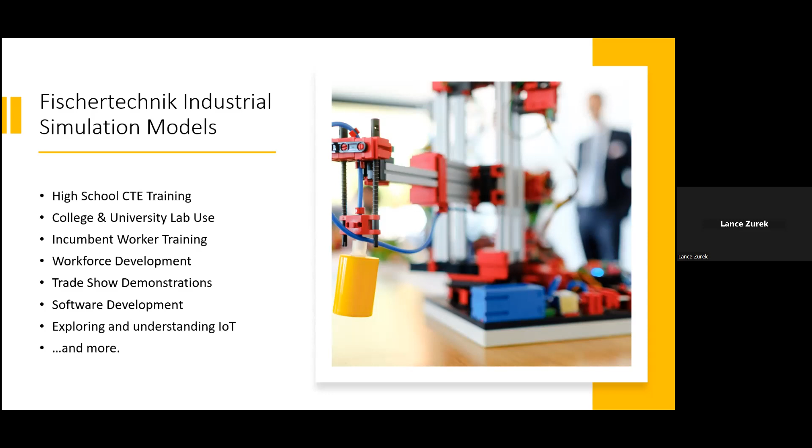So we're going to start off by considering the skills gap. If you've attended any of our other fischertechnik education webinars, you've probably heard me discuss the importance of STEM education. STEM is the acronym that stands for science, technology, engineering, and mathematics. It really should go without saying that STEM education has probably been the most hotly discussed topic in education over the last decade.

As most of us are aware, the push for developing STEM skills in students is largely to help best prepare them to take their place in the modern workforce. Not so long ago, when our parents or grandparents were entering the workforce, employers in areas such as manufacturing might have been satisfied with hiring workers who could demonstrate good motor skills and a solid work ethic.

But as manufacturing becomes more and more dependent upon automated processes and robotic control, employers now desperately need individuals who have backgrounds in areas such as mechatronics, industrial electricity, mechanical components, and programming PLCs.

And as it ties in directly with the solutions we're going to be looking at in this presentation, let's stop for a minute and consider that last skill area I just touched upon, that of being a PLC programmer.

First off, in case you're not familiar, let me explain exactly what a PLC is. The term PLC is an acronym, the letters of which stand for Programmable Logic Controller. Essentially, a Programmable Logic Controller, or PLC, is a very specialized computer used to control the types of machines and automated processes typically found in an industrial setting.

These are things like an automated manufacturing plant. As the world of manufacturing becomes increasingly dependent upon these automated control systems, the need for workers skilled in the programming of such systems grows exponentially.

So to get a clear idea of just how highly prized these kinds of programming skills are, here are some salary figures for PLC programmers as quoted from job search website neuvoo.com. Quote: the average PLC programmer's salary in the United States is $78,000 per year, or $40 per hour.

Entry-level positions start at $43,924 per year, while most experienced workers make up to $132,600 per year, end quote.

Now, as I worked on the original version of this webinar back in 2020, I took a look at the list of current job openings for PLC programmers listed on neuvoo.com. At the time, the list showed 15 positions being advertised, all showing salaries of over $75,000 per year, and two of which even listed salaries of $195,000 per year for PLC programmers.

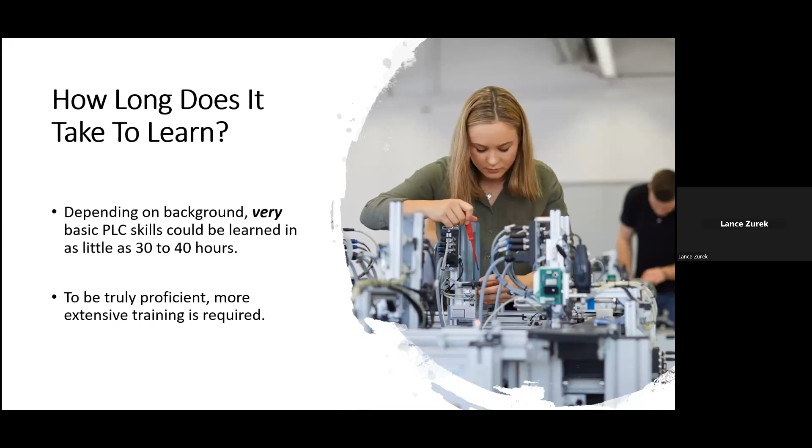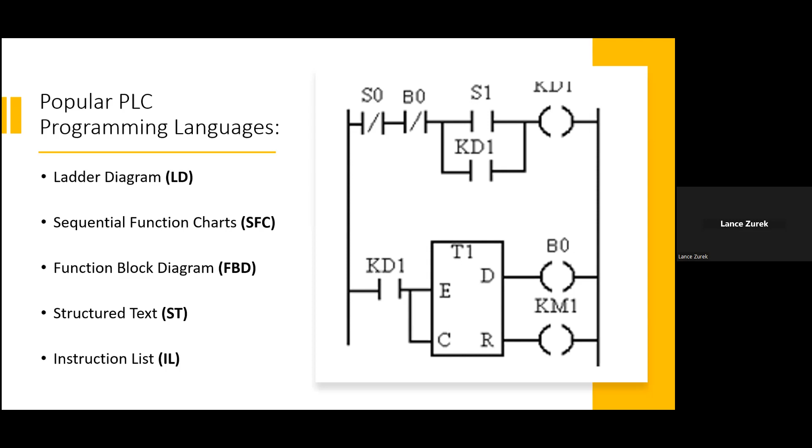Well, depending on a student's background and experience, very basic PLC programming skills can be learned in as little as 30 to 40 hours of study. Of course, to become truly proficient in all 5 of the most widely used PLC programming languages, which you see listed on the screen now, as well as really learning how to efficiently troubleshoot and address errors and equipment breakdowns, more training would be required.

Now, once again, while many students can learn PLC programming skills in a college lab setting, there are other options available—things like high school CTE programs, adult continuing ed programs, vocational training, technical training in trade schools, and employer-sponsored incumbent worker training programs.

That all being said, the question that still arises for the educator—whether you're in the university or the vocational school setting or whatever kind of classroom you're in—is how do you go about teaching PLC programming in a way that makes it engaging and relevant to the student, whatever their background? How do you get away from the dryness of textbooks and video presentations that had their moment, but now everybody's seen it, and instead make it more realistic and hands-on?

But before we go more into that, there are other areas of focus beyond just programming that need solutions for demonstrating, exploring, and understanding different aspects of automation and control systems. It could be a company involved in creating or marketing a new type of software-based solution that's looking for ways to make more tangible processes which might otherwise be perceived as abstract, or to test it out in a more realistic fashion.

Maybe it's a manufacturer looking for ways to better visualize the production process for workers or stakeholders as they prepare to build a new factory. Or perhaps it's even a company looking for engaging ways to demonstrate their services or solutions in a public setting, such as a trade show. In each of these cases, and there are more, there is a need for finding a solution that can effectively mimic and simulate real-world automated systems.

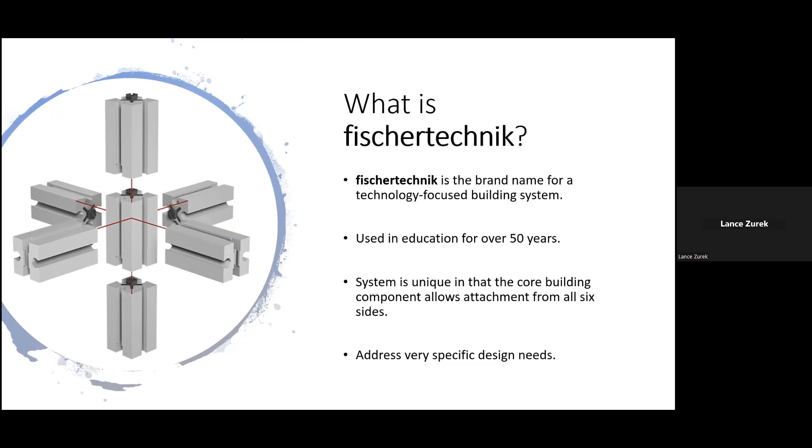Now, many of the parts that are used in the system are designed to slide together and lock in place using the tongue and groove assembly method—again, I would refer you to the diagram on the screen. And the hundreds of different parts available will also help you to address very specific design needs.

The system itself was created back in the 1960s by German inventor Arthur Fischer, who's noted for countless innovations used in both construction and the automotive industries. Mr. Fischer, at the time of his death in 2016, held more patents in his name than Thomas Alva Edison had amassed during his own lifetime.

Besides fischertechnik, Mr. Fischer was the inventor of synchronized flash photography, back in 1949, and he is also credited as the creator of the expanding nylon wall plug, which is commonly used in conjunction with a screw or a bolt to help anchor heavy objects to walls.

His company, the Fischer Group, still employs thousands of workers worldwide, producing many variations of fastening devices used in building construction. They also produce numerous components used in automobile assembly, as well as providing consulting services to companies who wish to employ state-of-the-art manufacturing processes.

Now, once again, the focus of fischertechnik sets, whether those intended for the retail market or for classroom use, has always been on helping to foster an understanding of technology. Many of the products offered by fischertechnik for the education sector are what we would call subject-specific sets, focusing on different STEM-related areas, things like mechanics, pneumatics, robotics, or renewable energy.

Now, in most of these sets, students are asked to build a progression of models using the unique fischertechnik system, and then perform various experiments, which allows them to explore and understand different aspects of that particular subject. There are also sets put together for a classroom program. There have been curriculum-based programs over the years, and also project-based learning programs using fischertechnik, where students do a lot of trial and error work, work in teams, and devise their own solutions to different problems, usually built around mechanics and automation. So that's kind of what the fischertechnik education line is usually about.

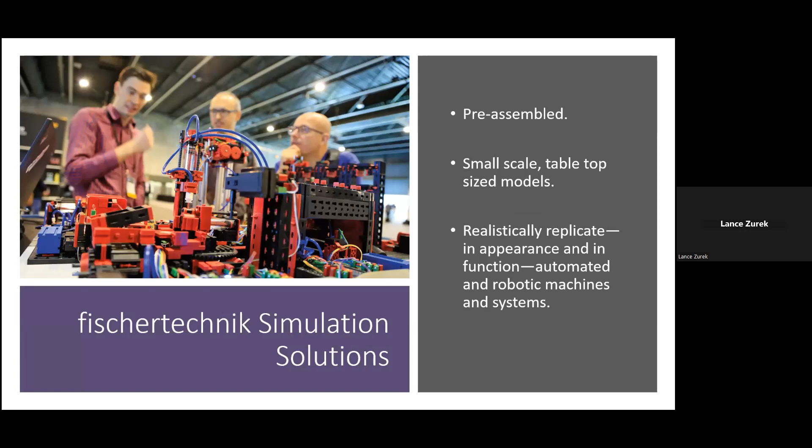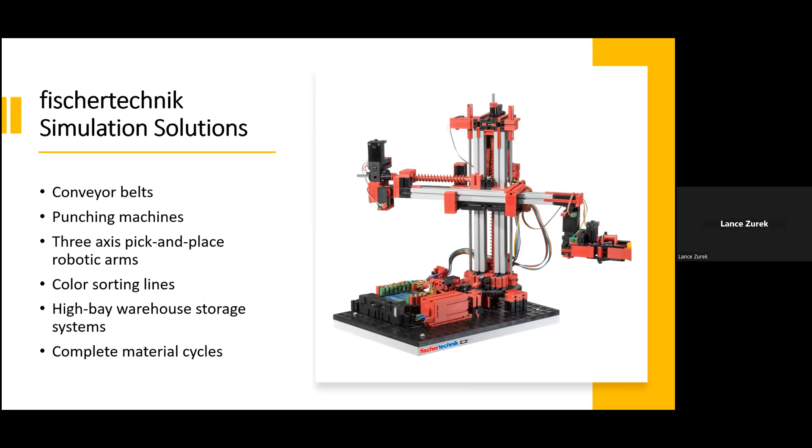Now, the line of fischertechnik simulation solutions, which are the focus of today's presentation, are something a lot different. This line consists not of kits, but a series of pre-assembled small-scale models designed to replicate in both appearance and function various automated robotic machines and systems. The types of models you'll find include conveyor belts, punching machines, three-axis pick-and-place robotics, color sorting lines, and even high bay warehouse storage systems. Besides these individual models, fischertechnik also offers an integrated factory simulation model, consisting of 4 individual workstations: a vacuum gripper robot, a high bay storage warehouse, a multi-processing station with an oven, and a sorting line with color detection, all combined to work together as one self-contained material cycle.

Now, before we begin to look at the models in the simulation line in more detail, I'm going to briefly outline some of the advantages of using fischertechnik solutions. I apologize in advance for any points I've touched on before, but I think in each case it's worth repeating.

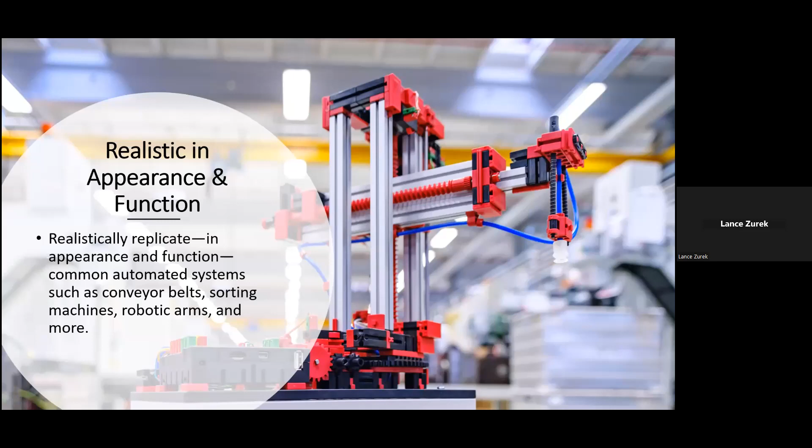First, fischertechnik simulation solutions allow educators to offer engaging, hands-on tools for teaching, exploring, and understanding various aspects of automation and programming. This can be for understanding how automated systems work, or for having a tangible physical system to observe and work with in a programming or PLC-focused learning environment. The models are designed to realistically replicate, in both appearance and function, common automated systems such as conveyor belts, sorting machines, robotic arms, and much more. Because the models are compact and in most cases tabletop size, they are ideal for use in the classroom or in-office demonstrations, but also for demonstrating software or other technology-based offerings in a trade show environment.

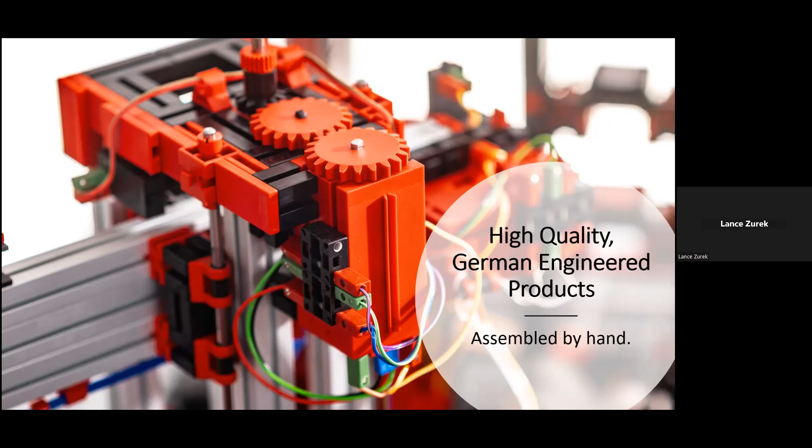The next factor is quality. Each fischertechnik simulation model is a hand-assembled, high-quality, German-made product. Each of these models is available in a 24-volt version, designed for use with industry-standard PLCs. It doesn't matter whether you use Allen Bradley controllers, if you prefer Siemens controllers, or if you use controllers from manufacturers such as Honeywell, Mitsubishi, General Electric—we could go on and on. In any case, you can control these 24-volt simulation models with the PLC you prefer.

Likewise, just as you can use your choice of controller, you can also use your preferred programming language from the versions listed on the screen right now. Please note that with the 24-volt versions, no PLC is included, with one exception which we'll talk about at the very end. But in most of these cases, no PLC is included. Any wiring from the model itself to where the PLC plugs in would be something the end user would have to take care of themselves. Any programming guidance, power supplies, and so on are the responsibility of the end user. So in most cases, unless noted otherwise, we're talking about a model that you're going to need to incorporate with the wiring, the PLC, and the programming on your end. If you're using a trainer or what have you, you could incorporate it with that as well.

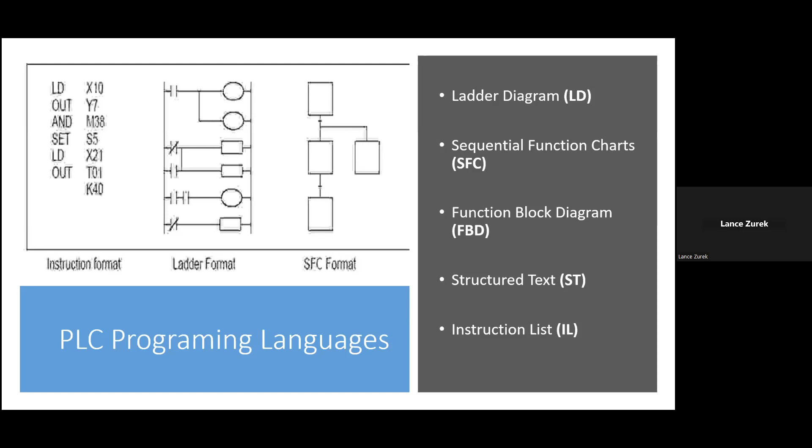Now, in addition, for non-industrial users and for educators who aren't versed in or familiar with using PLCs or getting into PLC programming, there are a select few models available in 9-volt variations. These 9-volt variations ship pre-wired to fischertechnik's own proprietary robotic controllers, called the Robotics TXT controllers, and some of the models are being upgraded to the new Robotics TXT 4.0 controllers. Each of these controllers comes pre-programmed using fischertechnik's own proprietary RoboPro graphic programming software.

In the case of the 9-volt models, the only additional component required on the end user's part is purchasing a 9-volt power adapter or power supply, and some models may require a few of these. I will mention this as we discuss each model. Otherwise, the 9-volt versions should be pretty much ready to use right out of the box.

If you're involved in demonstrating or exploring IoT, the Internet of Things, besides the fact that many end users have adapted models in the primary line of simulation and training solutions for IoT purposes, fischertechnik now also offers a special IoT-focused version of the factory simulation, designed specifically for exploring and understanding cloud control and what is often referred to as Factory 4.0.

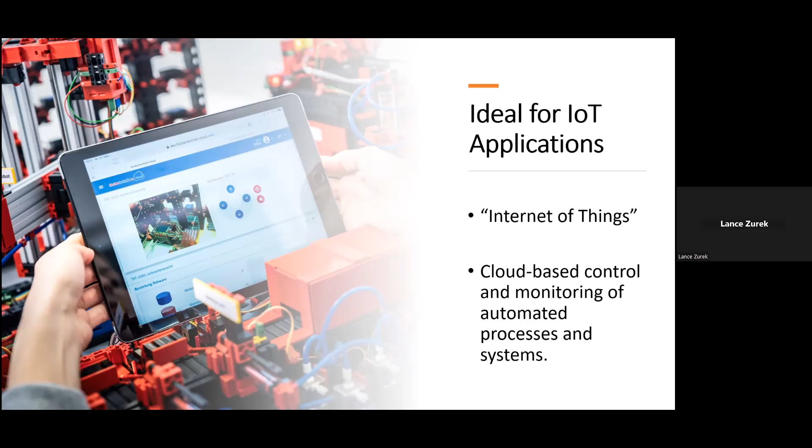Finally, fischertechnik simulation models are cost-effective. If you've had the opportunity to look at other hardware-based industrial simulation options in the marketplace, you'll notice the entry point for many products can easily be $20,000 to $30,000 or even much more. fischertechnik simulation solutions, on the other hand, are often available at just a fraction of that price, while still being compact, realistic, and high-quality learning and demonstration tools.

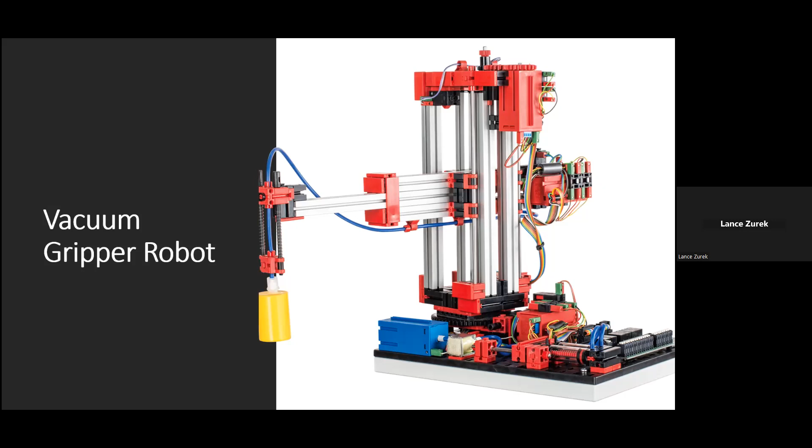First off, we're going to look at the vacuum gripper robot, as you see in the picture here. Got a little video we're going to share.

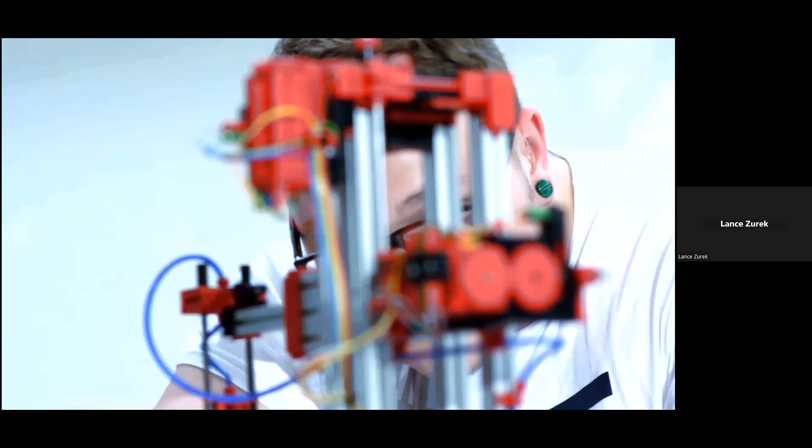As you're going to see in this video, the vacuum gripper is a 3-axis robotic model with a vacuum gripping device. The model is designed to precisely pick up and position workpieces in 3-dimensional space. It includes 3 encoder motors, 3 push-button limit switches, a vacuum suction device, a compressor—the blue brick component you see in the video—and a solenoid valve. The model's dimensions are approximately 9 by 19 by 15 inches, and it weighs about 7 pounds.

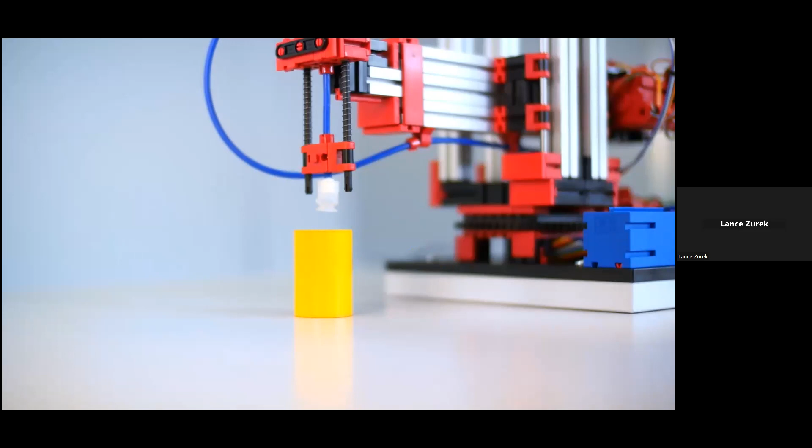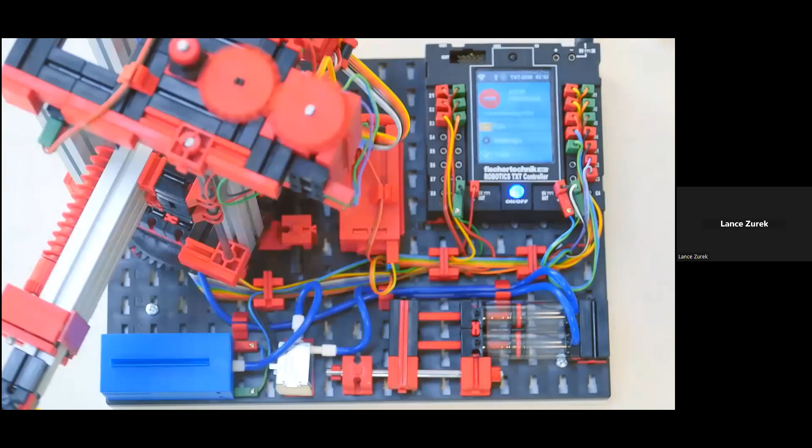The 24-volt version of this model, as well as all of the first 5 24-volt models we're going to look at today, each have a relay board for motor polarity reversal, and both a multi-pin connector with 34 pins at a grid of 2.54 millimeters, as well as additional PCB terminals with push-in connections for all inputs and outputs. This 24-volt version, as well as all the 24-volt versions we'll look at in this first part of the presentation, will require you to provide the PLC and the programming, and do any additional wiring.

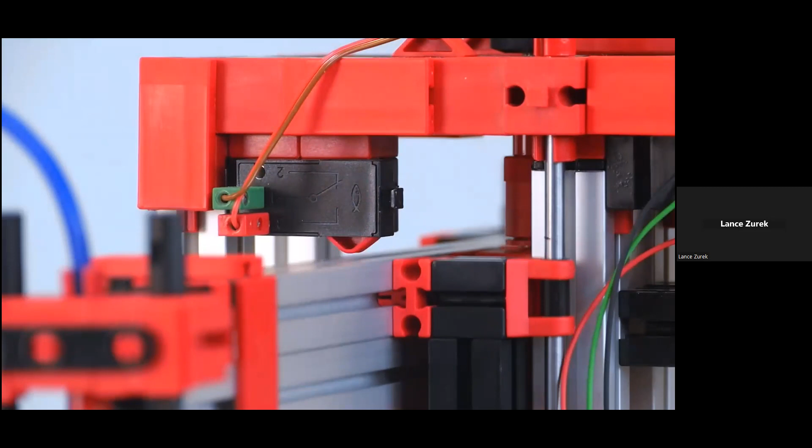I will also mention that for this and all the other models we're going to look at today, the specs are detailed in the product listings found on the Studica website and the fischertechnik.biz website, as well as in our product brochure, which I'll provide information on obtaining at the end of this presentation if you're interested. So we'll just let this play out for a second here.

And I will mention, as I didn't touch upon 9-volt versions, this one is not available in the 9-volt version.

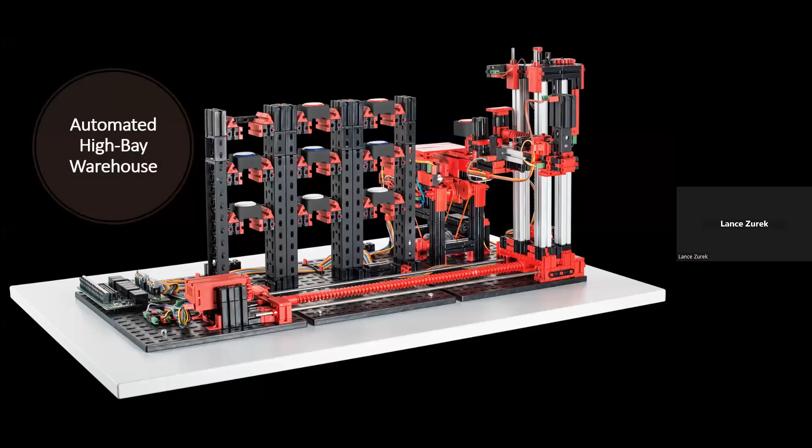The next model we're looking at, which will have a 9-volt version, is the automated high bay warehouse. The model you're going to see here features a transfer station with a conveyor belt, along with a shelf stacking mechanism for storing and retrieving workpiece carrier trays, and 9 individual storage spots. Components on this model include 2 encoder motors, 2 mini motors, 4 push-button limit switches, 2 phototransistors, 2 LED light barriers, and a selection of different colored workpieces along with carrier trays for each.

I will mention that this particular model ends up being a real favorite among educators I've spoken with who are involved in programming. The reason is it gives you so much to work with regarding the programming of the movement of the picker arm, the picker mechanism, and the precision needed to insert and remove the different workpieces from the storage bins. Because of all the specialized coding that has to be done for each of those steps, it's really beneficial for any classes working on programming.

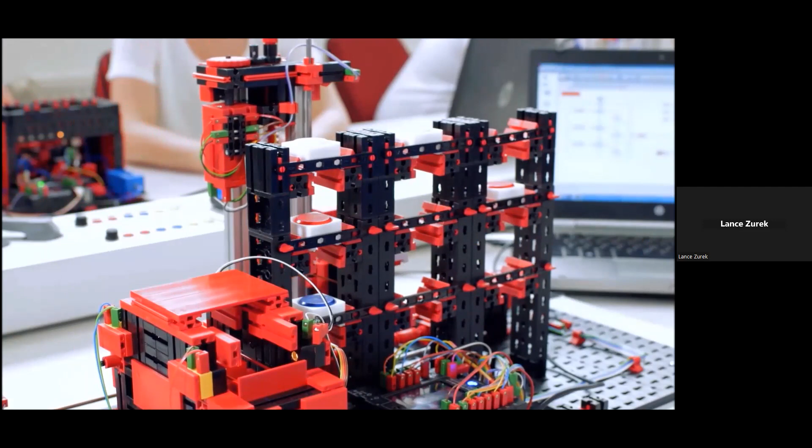The dimensions for the model are approximately 19 by 28.5 by 15 inches, with a total weight of about 18 pounds. Again, the 24-volt version has a relay board for motor polarity reversal in both the multi-pin connector, 34 pins with a grid of 2.54 millimeters, as well as additional PCB terminals with push-in connections for all inputs and outputs. And again, you will need to provide the PLC and the programming.

There is, as I mentioned, a 9-volt version available at this time, which is pre-wired to a pre-programmed robotics TXT controller, and it does require one power adapter, which we do sell.

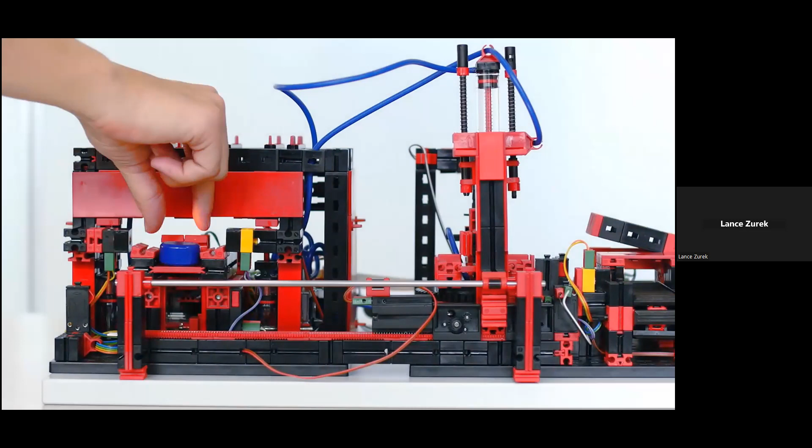The next model in the line that we're going to be looking at is the multi-processing station with oven. The model you're going to see here features a furnace simulation with a pneumatic sliding door. There's a downstream processing station with a pneumatic transfer unit that includes a vacuum gripper, a cutter with a rotary table, and a conveyor belt.

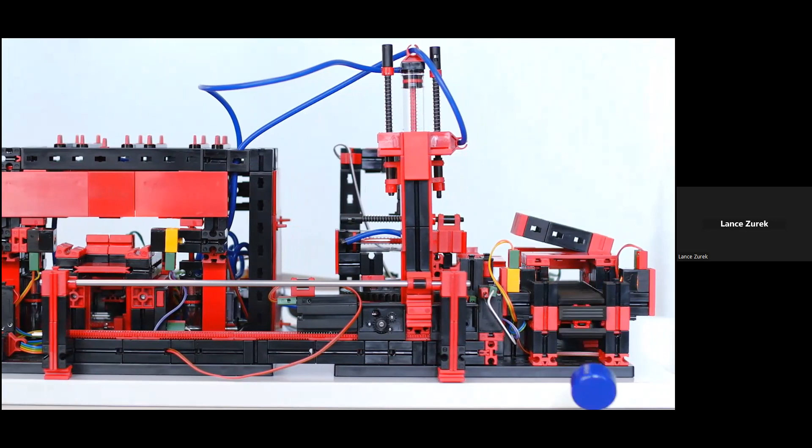Components on this model include 4 mini motors, 6 push-button limit switches, 2 photo transistors, 2 LED light barriers, 4 solenoid valves, and a compressor.

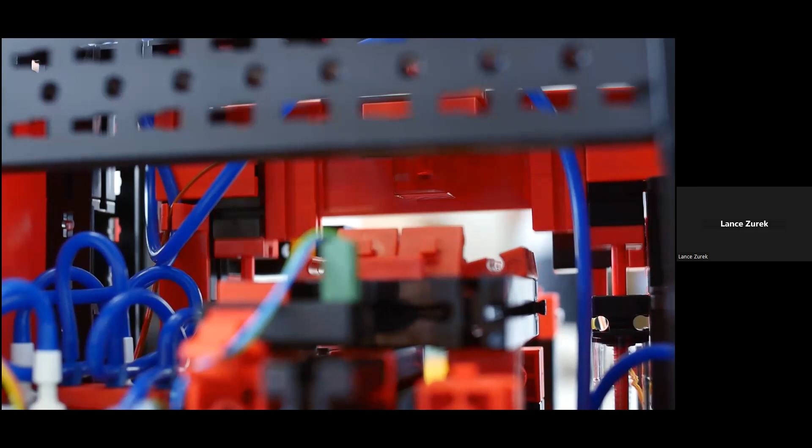The dimensions for this model are approximately 20 by 14 by 12 inches, with a weight of about 11 pounds. Again, the standard version of the model and the 24-volt version for use with a PLC of your choice has a relay board for motor polarity reversal in both the multi-pin connector, 34 pins with a grid of 2.54 millimeters, as well as additional PCB terminals with push-in connections for all inputs and outputs.

And there is a limited edition 9-volt version. In this case, it's connected to 2 robotics TXT controllers. Because of that, the 9-volt version would require 2 power adapters, not just 1.

Let this play for just a second.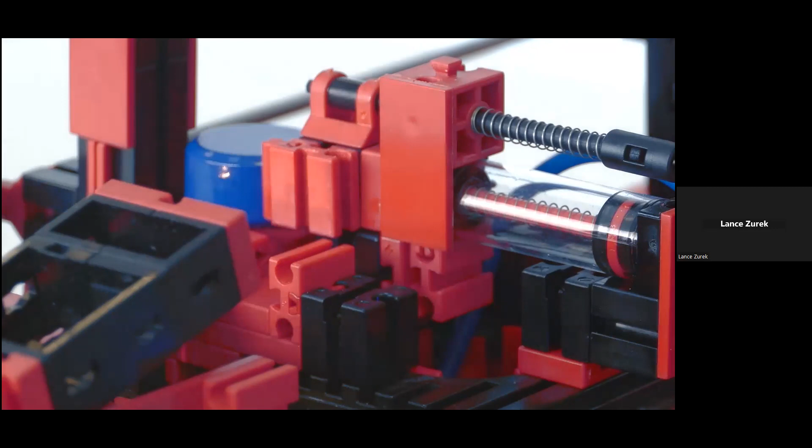Sometimes I get a little ahead of the videos, and sometimes the videos get a little ahead of me. And there we go. And she says it's cool.

The next one we're looking at is the sorting line with color detection.

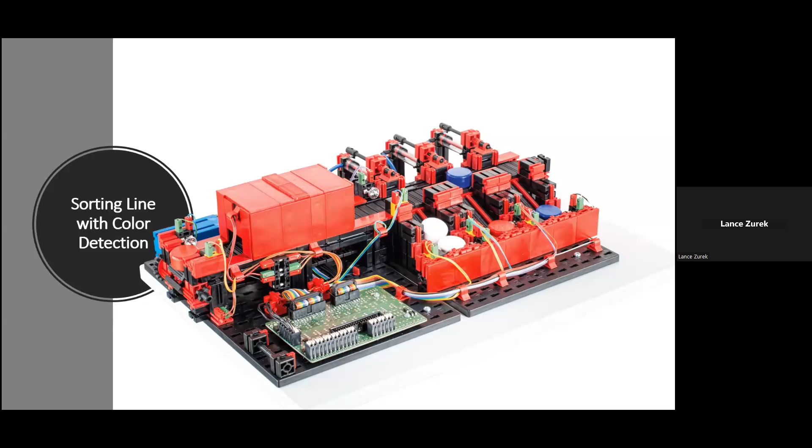Let me just do one thing here. Okay.

Now, this simulation features a system for detecting workpieces of different colors, and it sorts them via conveyor belt into 3 different storage bins. Components on this model include 2 mini motors, 5 photo transistors, 5 LED light barriers, 3 solenoid valves, a compressor, and an optical color sensor.

The dimensions for this model are approximately 20 by 14 by 12 inches, with a weight of just about 10 pounds. As with the models we've looked at before, the standard 24-volt version has a relay board for motor polarity reversal in both a multi-pin connector, 34 pins with a grid of 2.54 millimeters, as well as additional PCB terminals with push-in connections for all inputs and outputs. Again, you will need to provide the PLC and the program.

And the limited edition 9-volt version, in this case we do have a 9-volt version as well, again comes pre-wired to a pre-programmed robotics TXT controller, and one 120-volt power adapter is required for that.

We'll let this play for just a second. Oops.

And we'll just let this finish through.

The next model we're going to look at is the factory simulation, which combines the 4 models we've just reviewed: the vacuum gripper robot, the automated high bay warehouse, the multi-processing station with oven, and the sorting line with color detection into one self-contained material cycle.

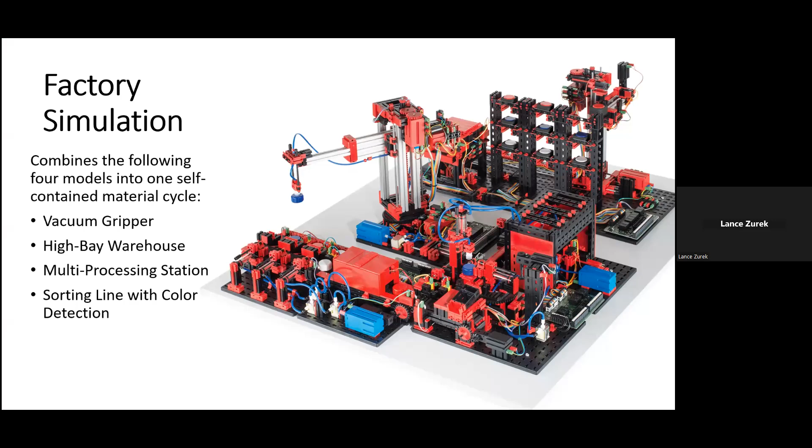The cycle works like this: work pieces are retrieved from the automated high bay warehouse using the vacuum gripper robot, then moved to the multi-processing station with the oven. After the workpiece has been processed by this machine, it is sorted by color in the sorting line with color detection before being again moved by the vacuum gripper robot to the automated high bay warehouse for storage.

As we've already discussed the components of each model previously, I'm not going to restate them here, but I do want to discuss the dimensions of this model as a whole. As it combines 4 individual models into one work cycle, it has a much larger footprint, approximately 39 by 31 by 16 inches, and a total weight of between 43 and 46 pounds, depending on whether we're talking about the 24-volt version or the limited edition 9-volt version.

Due to these dimensions, please note that this model will only be shipped flat as freight on a pallet. I also want to point out that as the factory simulation models tend to be in high demand, please anticipate a possible turnaround time of up to 3 weeks prior to any orders for this model leaving our warehouse.

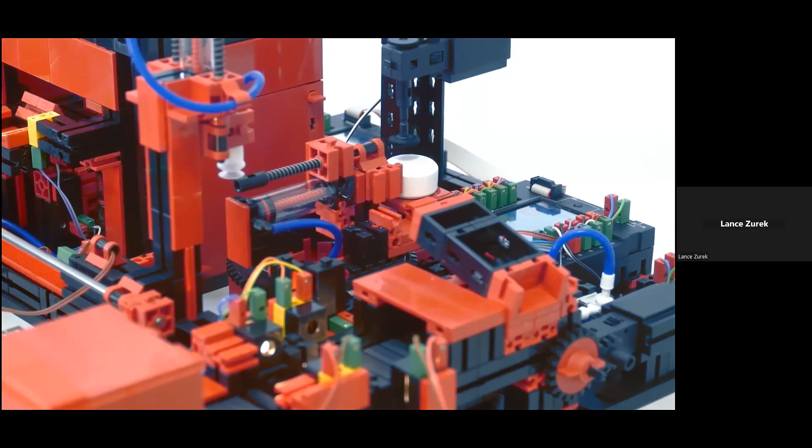A few things to note. First, this is currently available in the standard 24-volt version and in very limited quantities in a 9-volt variation as well. In the case of the 9-volt version, it's wired to 5 robotics TXT controllers, and as such, it's going to require 3 of the power adapters.

As always, the 24-volt version will require the end user to provide the PLC, the programming, and any other hardware required. Again, each station of the 24-volt version has a relay board for motor polarity reversal, multi-pin connectors, as I touched on before, and PCB terminals with push-in connections for all inputs and outputs.

Before we move on to the next group of models, I want to mention that there is a storage option available for those users of either of the 2 factory simulations we just looked at, who will need to transport the model or protect it when not in use.

The travel case consists of an aluminum case maker profile with plastic plates and steel ball corners, as well as 4 steel tilt handles and angle protection corners.

The upper section of the case is partially lined with soft foam blocks in different heights to help cushion the model, and it also has 3 internal zipper pockets for storing cables and other accessories. The lower portion of the case is lined with hard foam, and it's designed so that once the top of the travel case is removed, the model can remain in the bottom section of the case and be fully functional.

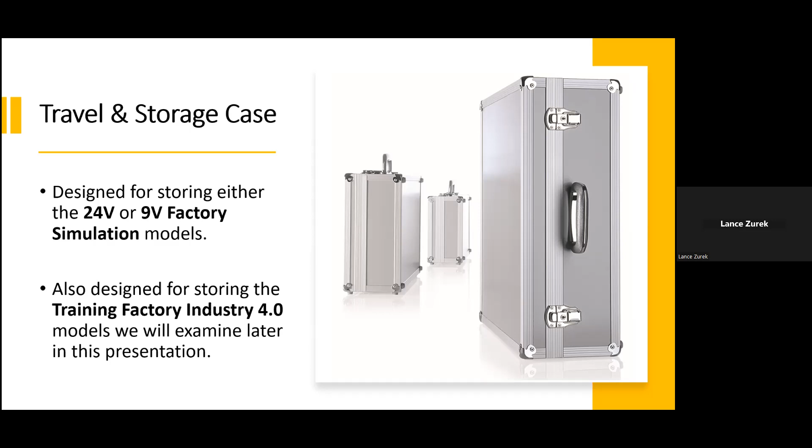The case has exterior dimensions of approximately 41 by 33 by 17 inches, and a weight of about 53 pounds. Please note that even when you use the travel case, these models will still need to be shipped flat, and if shipping them to a different location, you will still always want to ship them on a pallet just to protect them.

Moving right along, we're going to look at the conveyor belt. As you see, it's a very basic conveyor belt. It has a transport belt with a length of 275 millimeters that is used to transport work pieces with a diameter of up to 29 millimeters. Multiple conveyors can easily be connected to increase the length of transport as you may desire.

Components on this model include an XS motor, a push-button limit switch, 2 photo transistors, and 2 LED light barriers. Dimensions for the model are approximately 14 by 10 by 4 inches, and it has a weight of just about 2 pounds.

The next model is a variation of the conveyor belt, which includes a punching machine component. This features essentially the same conveyor we just looked at, except this time the machining station is built onto it. The components on this model include 2 XS motors, 2 push-button limit switches, 2 photo transistors, and 2 LED light barriers.

Dimensions of the model are approximately 15 by 12 by 7.5 inches, and it has a weight of about 3.5 pounds.

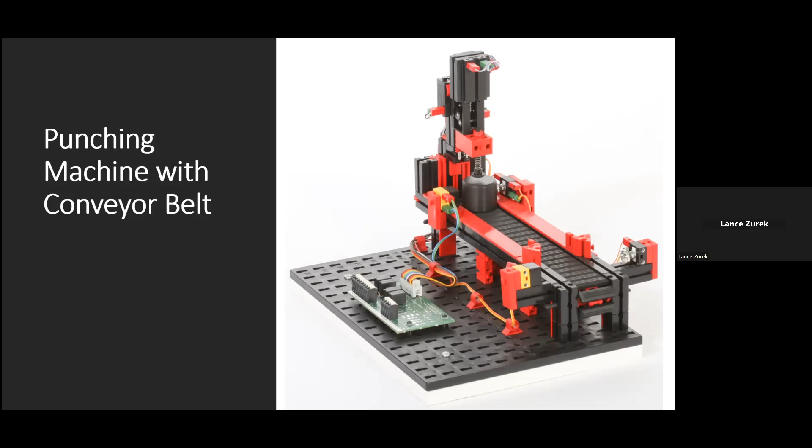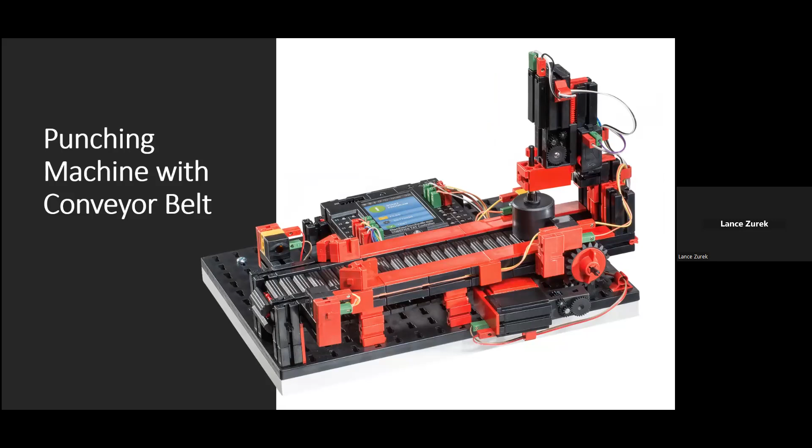Again, it's available in a standard 24-volt variation with the 26-pin connector and the 2.54 millimeter grid shown here. We also have, for a limited time, a 9-volt version wired to the robotics TXT controller, and a 120-volt power adapter is required with that.

The next model is the indexed line with 2 machining stations. This model features a U-shaped conveyor line consisting of a milling and a drilling station, and 4 conveyor belt sections. Components on this model include the 4 conveyor belts, 8 axis motors, 4 push-button limit switches, 5 phototransistors, and 5 LED light barriers. The dimensions of the model are approximately 19 by 18 by 11 inches, and it has a weight of just about 8 pounds.

Again, it's available in both the standard 24-volt version with a 26-pin connector and a 2.54 millimeter grid for use with a PLC, and in a limited release 9-volt version wired to the pre-programmed robotics TXT controller, again requiring 1 power adapter.

Next is a variation on the idea of a pick-and-place robot, the 3D, or as it's also known, 3-axis robot. The 3-axis robot has gripping forceps, which it uses to help it quickly and precisely position the workpieces it picks up in 3-dimensional space.

The degrees of freedom for the robot are as follows: Axis 1 turns 180 degrees, Axis 2 can move forward or back 90 millimeters, and Axis 3 can raise or lower 150 millimeters. Components on this model include 2 axis motors, 2 encoder motors, and 4 push-button limit switches.

Dimensions of the model are approximately 19 by 16 by 9 inches, and it has a weight of just about 6 pounds. Again, this comes in either a 24-volt version with a 26-pin connector and 2.54 millimeter grid, designed for use with the PLC and programming of your choice...

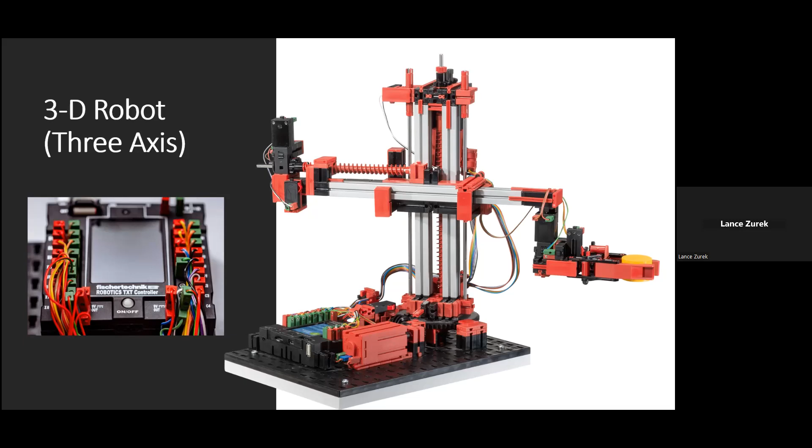That concludes our look at the first 9 variations of simulation models.

The next group of simulation models we're looking at is going to focus specifically on the area of IoT and is designed for demonstrating and teaching about cloud-based monitoring and control. These models go by the name of Training Factory Industry 4.0, and they are available both in a 24-volt version for use with PLC and a 9-volt variation for classroom and demonstration purposes.

This model has been designed to help address how recent changes in industrial production driven by digitization have created a need for stronger networking and more relevant information on all production levels. With this Industry 4.0 update of the existing factory simulation model, such digitization activities can be simulated, learned, and applied on a small scale before they become implemented on a larger scale.

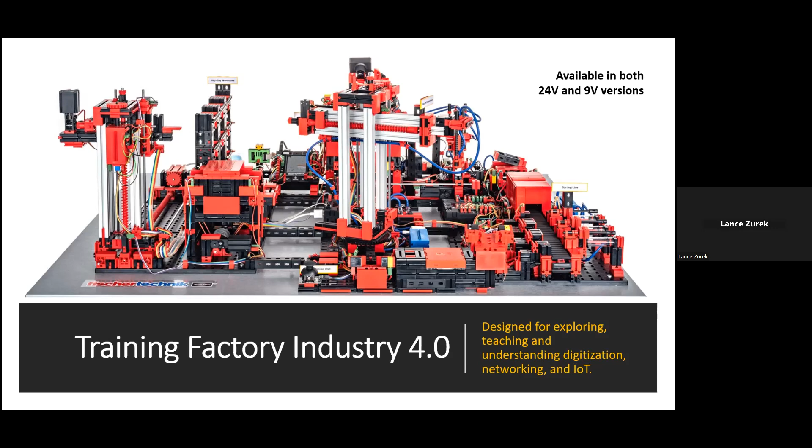As this video showcasing the 24-volt version does provide a nicely narrated overview of all the aspects of how the factory works, I'm going to step back for a moment and allow you to watch and listen to the narrator.

Fischertechnik Training Factory Industry 4.0 illustrates processes for a digitized smart factory, from delivering raw material to the finished product. Industry 4.0 applications can be tested and demonstrated using the simulation model that has already been set up.

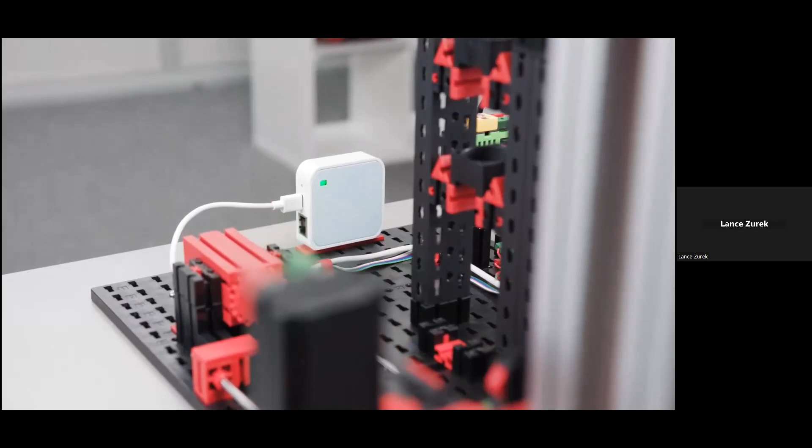Digitization activities are simulated on a small scale and learned before they are used on a large scale. The training and simulation model demonstrates the process from the delivery, collection, and storing of the materials...

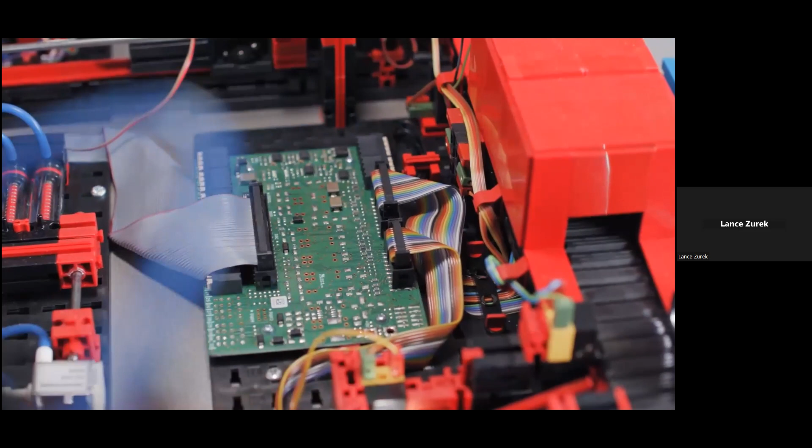...through the ordering and the manufacturing processes to delivering the finished product. The training factory industry is controlled by a PLC controller, a Raspberry Pi as IoT gateway, and a TXT controller.

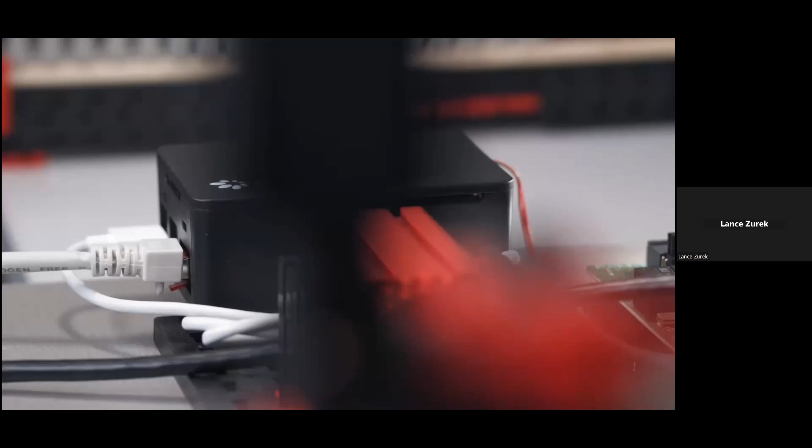The PLC program controls the individual modules of the factory. The program is written in structured text. The PLC communicates via the standard OPC UA protocol with the Raspberry Pi, which acts as an IoT gateway to connect the factory to any cloud.

The program on the Raspberry Pi is implemented in Node-RED. In Node-RED, there is an additional local dashboard available, which can be adapted to your own needs.

The Raspberry Pi also communicates with the TXT controller via the standard MQTT protocol, which in turn enables access to the Fischertechnik cloud. The program on the TXT controller is executed in C/C++.

The sensor image data are used and monitored in the Fischertechnik cloud. The integrated WLAN router transmits factory process data to the cloud in real time.

The data is presented on a web-based dashboard. 3 views are available: the customer view, supplier view, and production view.

The views and data can be accessed using internet-enabled devices and can also be used remotely. The USB camera is controlled from the cloud and can view the entire factory.

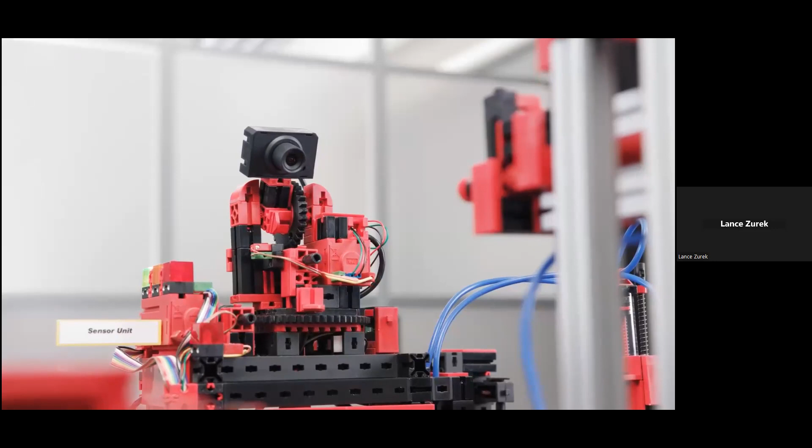A sensor station measures air pressure, air quality, temperature, humidity, and brightness.

The default process cycle begins with storing and identifying the material. Using RFID NFC technology ensures that the material can be digitally traced. The integrated NFC tag stores production data that can be read out via the RFID NFC module.

The cloud displays the part's color and the ID number. The vacuum gripper places suction on the material and transports it safely to the high bay warehouse. The production view on the dashboard shows where the product is in the manufacturing process.

The first-in, first-out principle applies to outsourcing. The goods that were stored first are also the first to be removed.

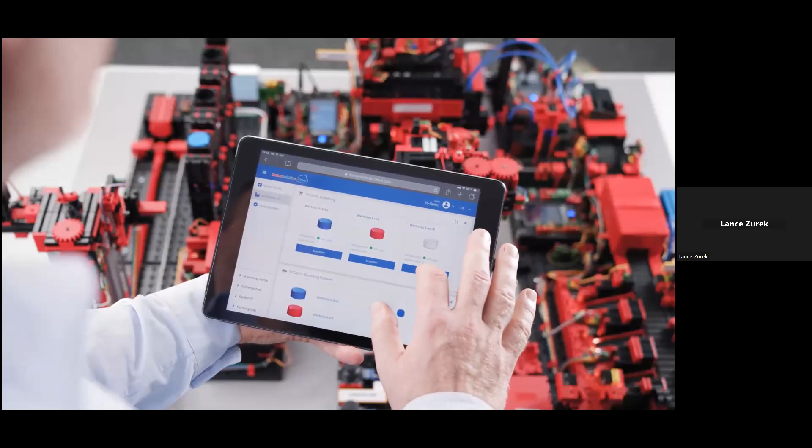Ordering material is triggered online on the dashboard. The desired product and the corresponding color are selected in the customer view and then placed in the shopping cart. Customer-specific production takes place in lot size 1.

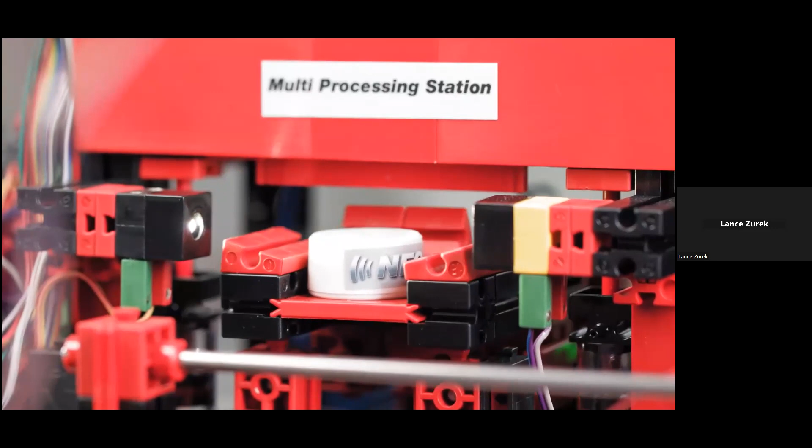The production process is simulated in 2 steps. The suction gripper passes the material on from one step to the next. The material is transferred to the sorting system once production is complete.

The sorting system receives the allocation command as soon as the color sorter detects the proper color. The material is sorted using pneumatic cylinders. The production data is written on the material at the end of the production process.

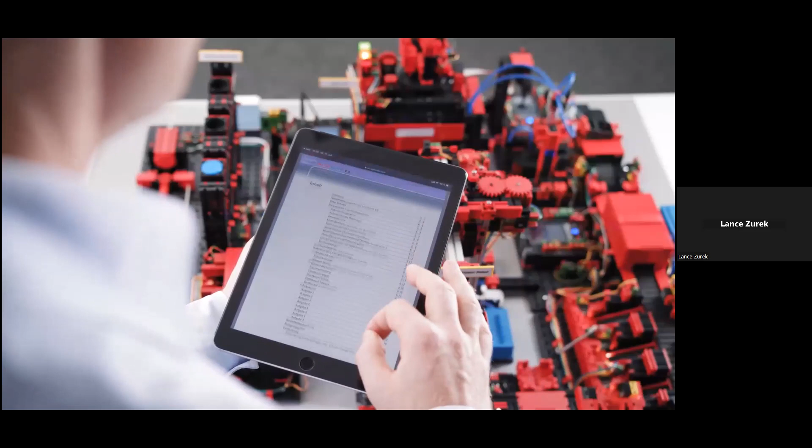The finished product will be provided for collection. Instructional material and the source code for the stored programs are available online.

The Fischertechnik Learning Factory 4.0 is ideally suited for education and training in vocational schools and companies, for research and teaching in colleges and universities, for development projects in IT departments, for production planners, and for demonstrating in-house software solutions at trade shows and other corporate events. The customized storage and transport case is a worthwhile add-on.

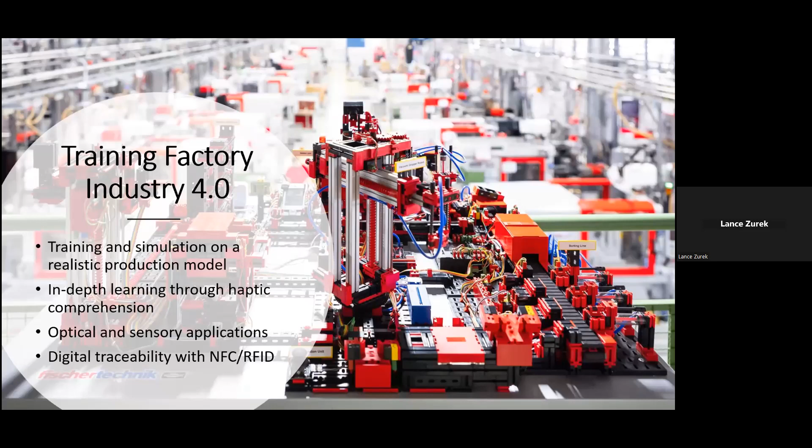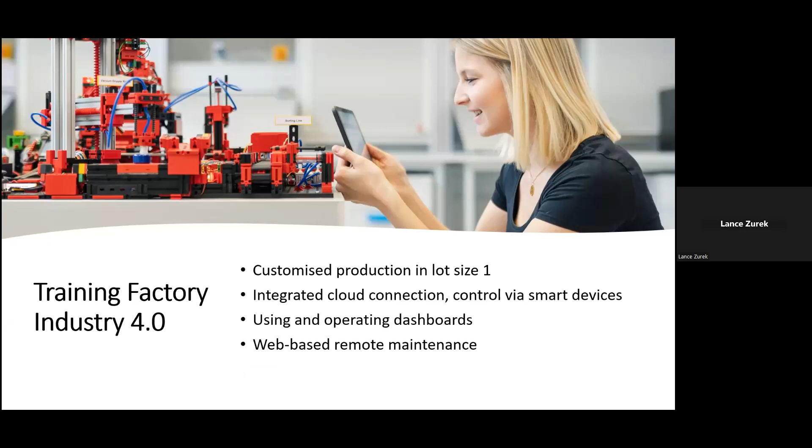So giving a little bit of a summary, the following topics can be addressed with the Fischertechnik Training Factory Industry 4.0: training and simulation on a realistic production model, in-depth learning through haptic comprehension, optical and sensory applications, digital traceability with NFC/RFID technology, customized production in lot size 1, integrated cloud connection and control via smart devices, using and operating dashboards, web-based remote maintenance, the linking of production and materials planning data, and the connection of upstream and downstream logistics processes.

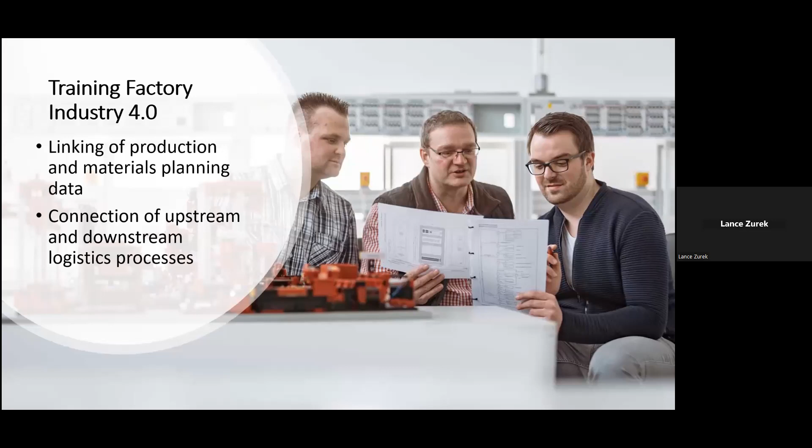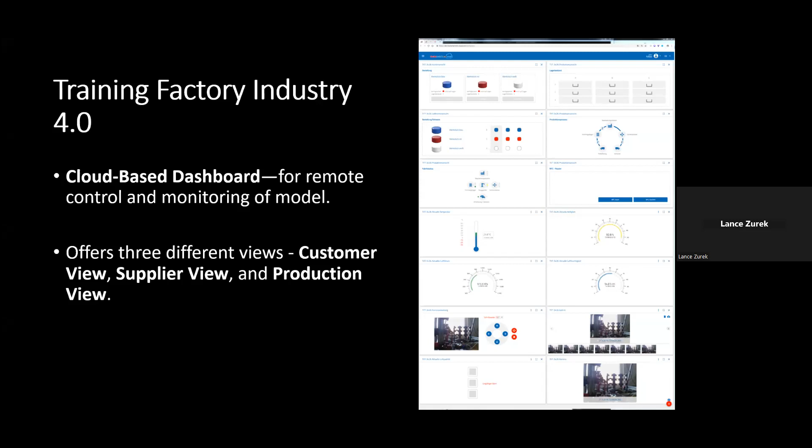Now, as you just saw, this model incorporates many features not found in the models we looked at previously, most notably being the use of the cloud-based dashboard for monitoring and controlling the model. Some other examples would be the camera that's used for visually monitoring the factory functions from the cloud-based dashboard, as well as the environmental sensor, which collects data on variables such as temperature, air quality, humidity, and air pressure.

And the use of NFC chips in each individual workpiece, each of which again has a unique identification number, enabling the position of each piece in the work cycle to be mapped. And the use of MQTT, message queuing telemetry transport, that allows the networked TXT controllers to communicate with one another.

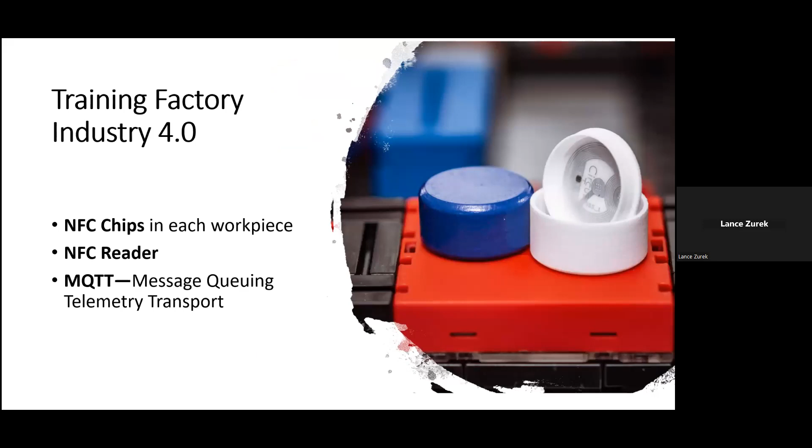Now, as there are two variations of this model, let me talk about what makes them different aside from the voltage requirements. And we're going to begin by focusing on the 24-volt version and what makes it unique. First off, it is a bit of a hybrid in that while requiring a PLC for operation and control, it also incorporates one fischertechnik robotics TXT controller. In this case, the TXT controller serves as the MQTT broker and interface to the fischertechnik cloud.

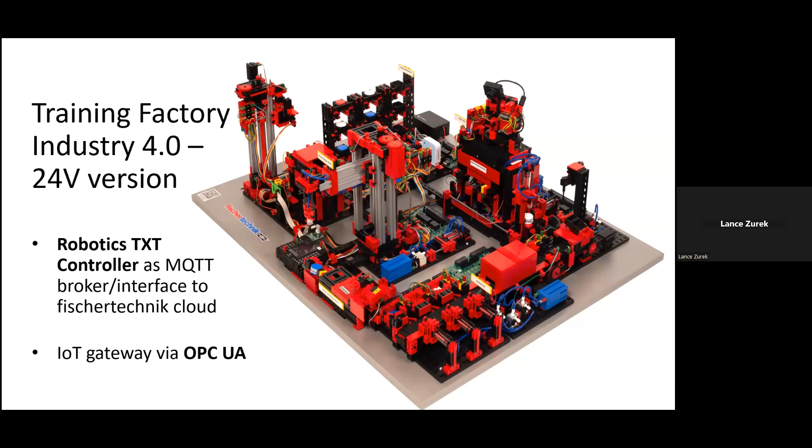Communication between the PLC and the TXT controller is carried out using an IoT gateway via OPC UA. OPC UA, which is also known as OPC Unified Architecture, is a standard for exchanging data across different platforms.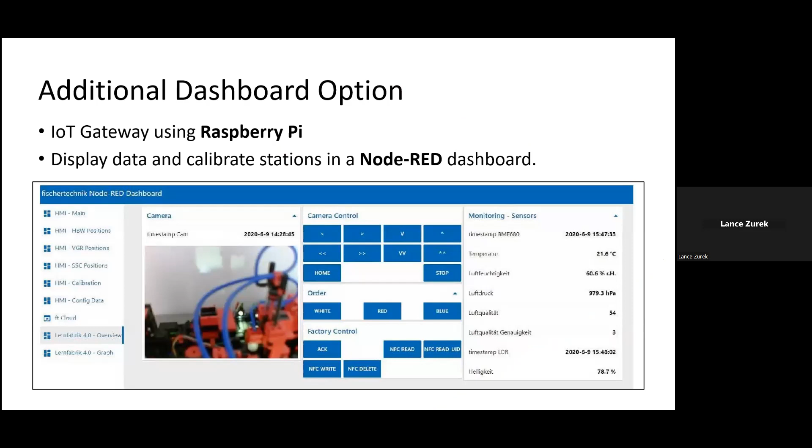Now, in addition to the TXT controller used here, there is also an IoT gateway using Raspberry Pi with Node-RED, and this allows for the option to not only present and use data on a dashboard in the fischertechnik cloud, but also to display data and calibrate stations of the factory in a Node-RED dashboard. The model also incorporates newly developed 24-volt adapter boards to interface to the PLC, and these, of course, all ship as part of the assembled training factory and are connected to the PLC via terminals.

Now, among other things, the latest generation of adapter boards allows the speed of the encoder motors to be controlled via PWM, pulse width modulation, and they also have push-pull output stages for phototransistors and for buttons.

Finally, one of the most important new features: unlike any of the previous 24-volt models we've discussed, the new 24-volt Training Factory Industry 4.0 also includes access to a sample program. In this case, the sample program is in structured text format, and it was created to be used with a Siemens S7-1500 PLC, and this is available for download on GitHub. Of course, the new Training Factory can also be controlled with other PLC models and brands once the end user makes some small adjustments to the sample program.

And to enable you to do this, there is also source code needed that's also available for free download from GitHub. Now, as with all the other 24-volt models we looked at today, the Training Factory Industry 4.0 has the relay board for motor polarity reversal and both a multi-pin connector. Again, this is the 34-pin with grid of 2.54 millimeter variation, along with PCB terminals with push-in connections for all inputs and outputs. And again, all of this information and much more can be found in the 152-page PDF manual, which can be downloaded from the fischertechnik website, or if you need it from me directly, I'll be happy to send that to you. I will provide information at the end of this presentation.

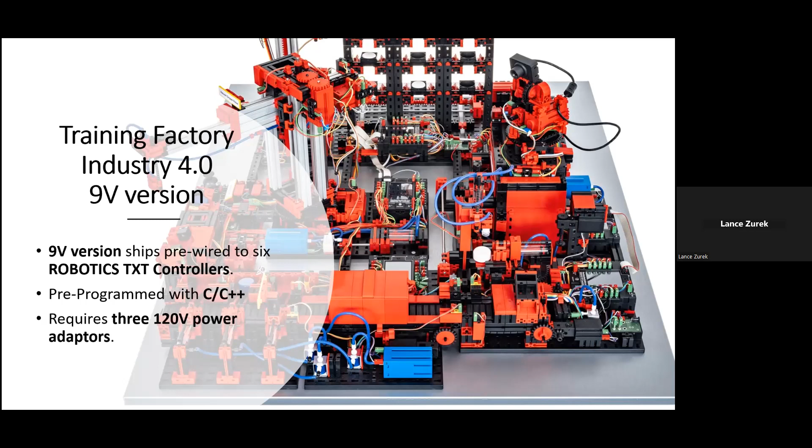Dimensions for these factory models are approximately 39 by 31 by 16 inches. They have a weight of approximately 51 to 53 pounds each. And as with the 2 factory simulation models which we looked at previously, we do recommend the optional travel and storage case to help protect your model during transport or storage. And that is the Training Factory Industry 4.0 model, now available in both 9-volt and 24-volt variations.

Of course, the next question would be about the pricing on these models. So we're going to take a quick review of each option that I've discussed along with the pricing.

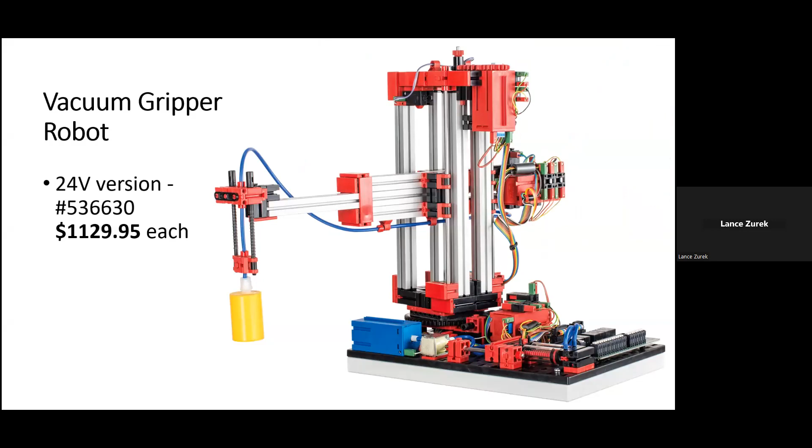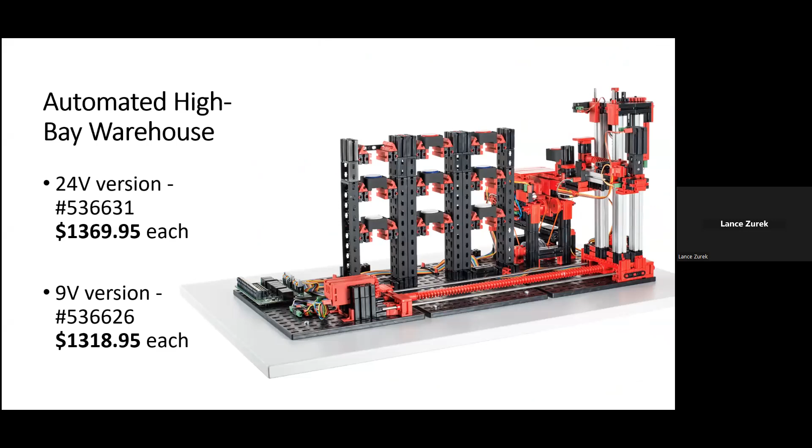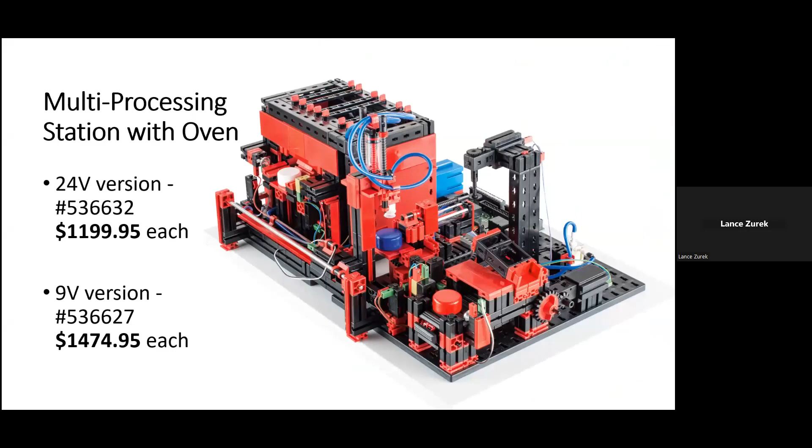First off, on the vacuum gripper robot, only available in the 24-volt variation, it is $1,129.95 each. The automated high bay warehouse is available in both versions right now. The 24-volt version is $1,369.95. The 9-volt version is $1,318.95. The multi-processing station with oven in the 24-volt version, requiring PLC, is $1,199.95.

The 9-volt version is $1,474.95. The sorting line with color detection in the 24-volt version is $1,049.95.

In the 9-volt version it is $1,128.95. The factory simulation in the 24-volt version for use with PLC is $4,829.95. If you would prefer the 9-volt version with the TXT controllers connected, that is $5,239.

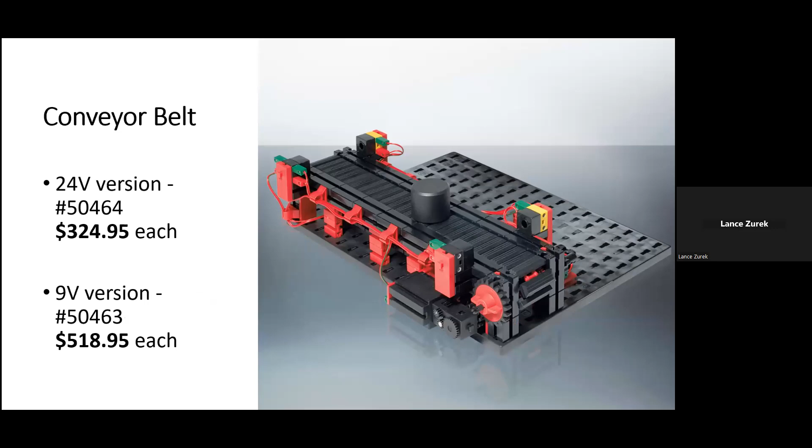The conveyor belt in the 24-volt version is $324.95. In the 9-volt version with the TXT controller it is $518.95. The punching machine with conveyor belt in the 24-volt variation is $419.95 for use with PLC.

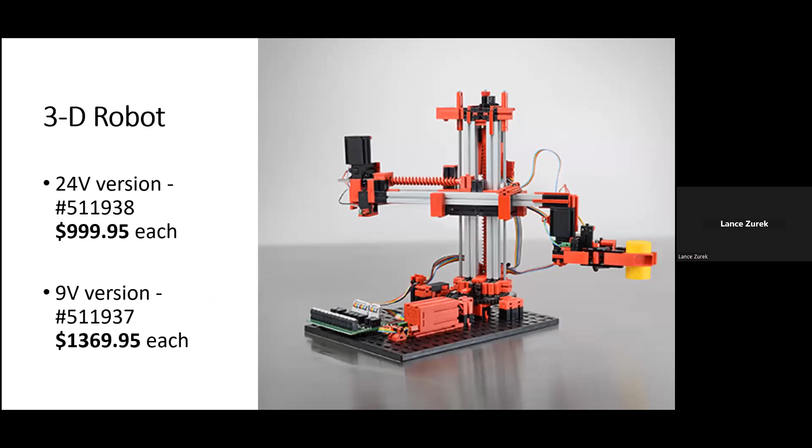The 9-volt version with the TXT controller is $599.95. The 3D 3-axis robot in the 24-volt version is $999.95, and in the 9-volt version, $1,369.95.

The index line with 2 machining stations in the 24-volt version is $1,129.95, and in the 9-volt version is $1,394.95. And the Training Factory Industry 4.0 models focused on IoT and cloud-based control in the 24-volt version, again, with the sample program that you get access to.

That's $8,999.95, does require the PLC, the additional wiring, etc. The 9-volt version is available with the TXT controllers, and that is $9,024.95.

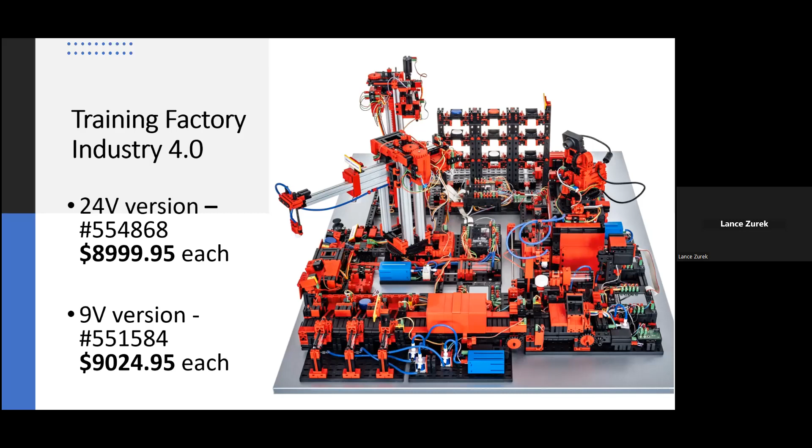As I mentioned before, there was going to be a variation with PLC, and we're going to talk about these now. There are new Training Factory Industry 4.0 models, only the 24-volt version. There is one that includes the PLC connector, meaning all of the wiring that has to go from the model itself to the PLC connection board has been done for you. You'll still have to provide the PLC for that, of course.

That variation is $12,079.95. Or if you want a version that includes all of that wiring, includes the PLC, includes the programming, and includes the power supply, that version is available if you're ordering for an academic institution for $18,499.95. If this is for commercial private use, it is $20,124.95. And again, that includes the Siemens PLC S7 1500.

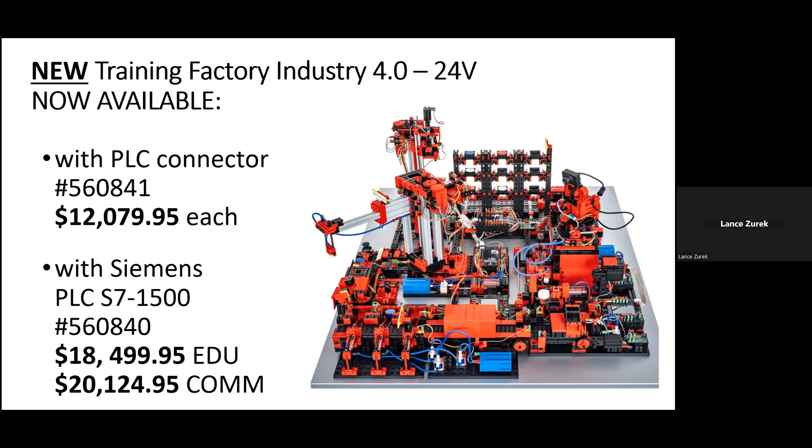Other items I've touched on several times throughout the presentation: the 120-volt power adapters for use with the 9-volt models, and also for the Training Factory Industry 4.0, you need one of those for the 24 volts to help power up the TXT controllers you use there. Those are $12.99 each. The travel and storage case, which can be used for all of the factory simulation and Training Factory Industry 4.0 models we looked at, that travel case is $1,524.95 per unit.

Breaking news, there is a new model called Quality Control with AI. And this is rather interesting. What this allows you to do is basically to begin to introduce the AI component.

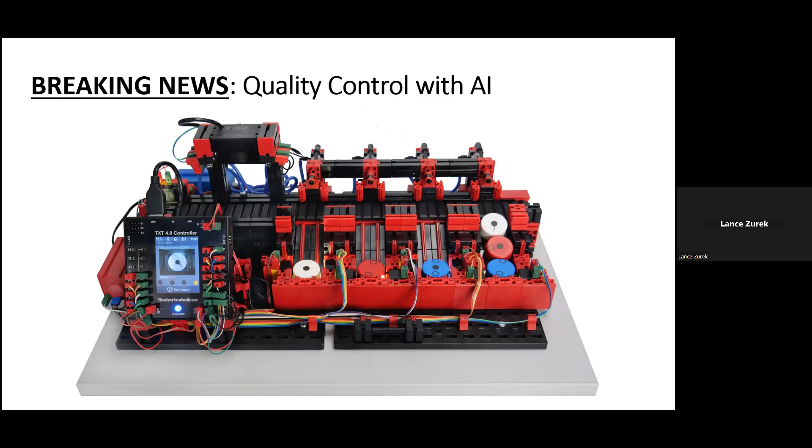The model has, as you can see, a conveyor line that has sorting bins. But in this case, the model sorts the parts based on not only what they should be, i.e. the color and markings they should have, but also sorts out what are called 'defective parts' - pieces that are, let's say, not labeled properly, that might have a crack in them, what have you. It's set up so that a camera takes a picture of each model as it's passing through the conveyor, and it's able to judge, using the AI component, whether it is a good piece or a bad piece. Then it's sorted into each of these bins.

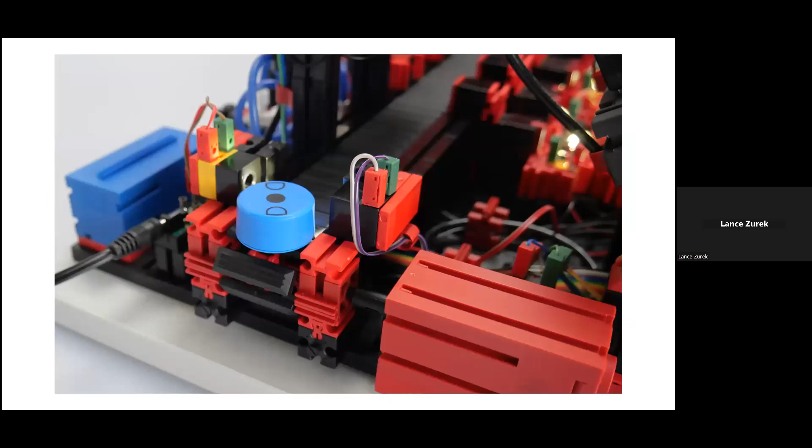Let's run through some of the slides here. This model is currently only available in a 9-volt variation. We do expect to have the 24-volt variation available in the next month or two, so we're just waiting for the news on that.

So currently, the 9-volt variation of this is available. This, again, comes pre-wired to the Robotics TXT 4.0 controller, pre-programmed. That version is $2,089.95. And again, the 24-volt version is expected this fall, so we're going to have more information on that soon.